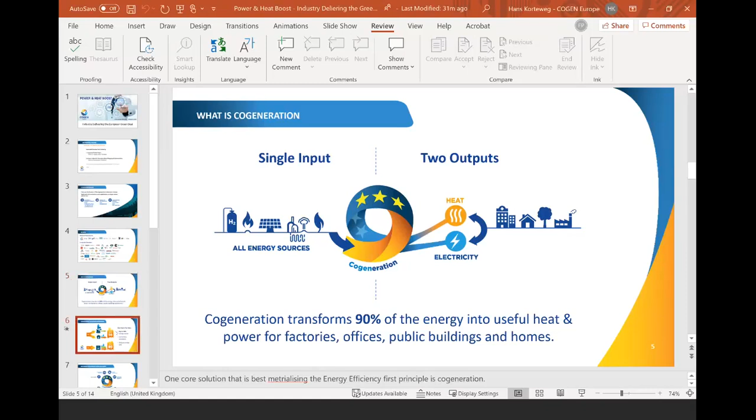The efficiency gains are well established, well known, and well proven in terms of how they are tracked and reported. It's one of the few sectors - in fact, it may be the only sector - that has full transparency of its efficiency. Most other sectors, it's more implied than given. A well-installed cogeneration plant can save up to 40% primary energy. It will cut carbon emissions, and it will reduce the consumer's energy bills. Those three things are the raison d'être for cogeneration.

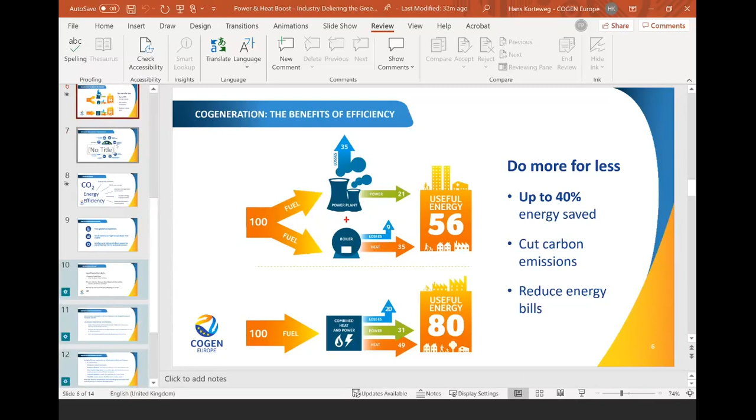Cogeneration is supported by many pieces of EU legislation. Sometimes they could be better, of course, which is Cogen Europe's job - to ensure we get an improvement. But it's especially apt for meeting the new challenges of the EU's energy systems. So it saves energy, as I've already mentioned. It cuts carbon dioxide emissions. It lowers energy costs, which is crucial in this sector for global competitiveness of industry. It allows the integration of renewable energies.

It provides flexibility across heat and power sectors. It avoids costly grid reinforcements. And, to use a horrible jargon word, it is smart grid ready. The final point is it empowers citizens and businesses to engage in the energy sector, where without cogeneration they're often just consumers of gas and power or whatever other fuels.

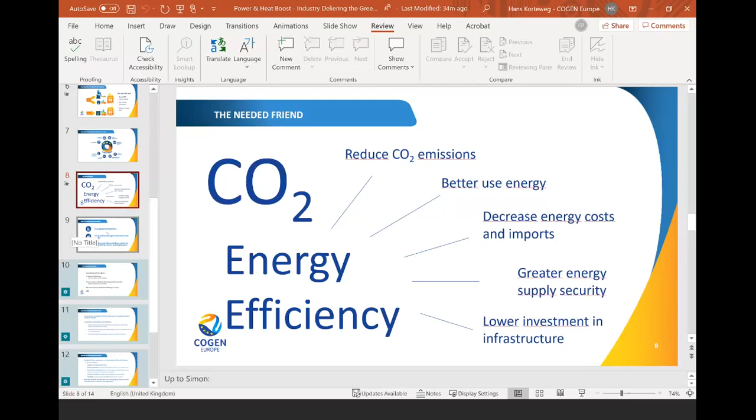There's been enormous focus over the last few years on CO2 emissions, and the energy efficiency principle has been sort of downgraded a bit. But energy efficiency is vitally important in this process. Energy efficiency means you need less fuel to do the same activities, so cogeneration is a better use of input energy, whatever that input energy may be. It reduces costs and the need for imports of energy into the EU system. It provides greater security of supply, and ultimately it is the least cost and most efficient way of delivering heat and electricity services.

Focusing now on the industrial sector, many industries across Europe use cogeneration already. It is a substantial piece of the utility infrastructure for industries. It helps them face global competition. It is especially important where you have the need for high temperature heat and steam, and alternatives to that are either vastly more expensive or effectively technically impossible. It allows industry to have that flexibility and a certain amount of insulation from fluctuating energy markets.

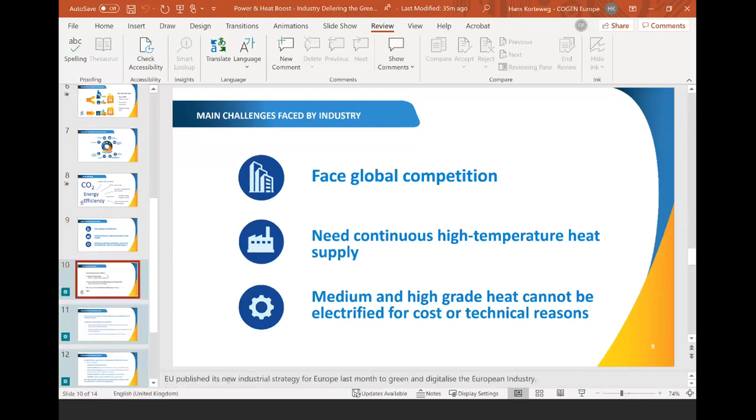So my final slide now was just to introduce the speakers again. We have two speakers with different case studies: one on toilet paper and the other on green industrial processes. Now I hand over to Marc Vignal from Solar Turbines to talk about the impact on the toilet paper industry, which, given the coronavirus aspects and the run on toilet paper, is a very apt subject for today's discussion.

Thank you, Simon. So, quick question: do I present the slides myself, Hans, or? Yes, Thomas is about to give you presenter mode. Okay, so... share. You should be able to see my slides right about now.

Perfect. Okay, thank you, Simon, for the introduction, and thank you to Cogen Europe for enabling this outreach of information to members, participants, and invitees alike. My name is Marc Vignal, I'm the marketing manager for Solar Turbines based in Belgium. We thought it would be very interesting to present a case on something very close to everybody's heart right now.

As Simon mentioned, the run on toilet paper earlier in the year due to the pandemic makes it clear to us that it is something of essential need, and we're happy to present a case study to support this.

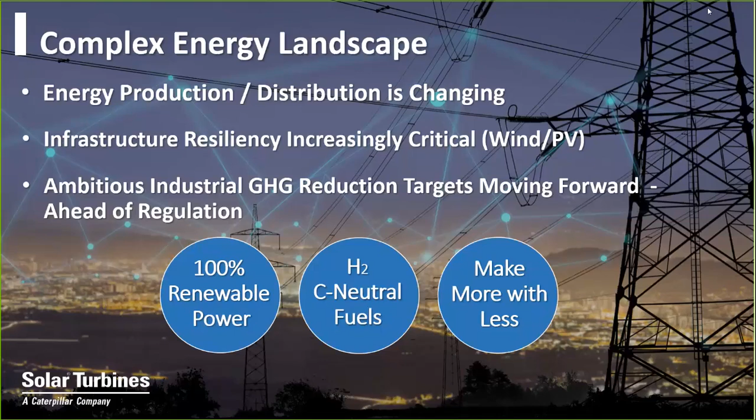Now, in terms of the footprint, obviously, industry is trying to make its own impact. We see beverage companies moving to different types of packaging to cater to customers' needs. And we see the champions of the recycling and biomass industry, tissue manufacturers and the pulp and paper industry, doing what they can to become less energy intensive.

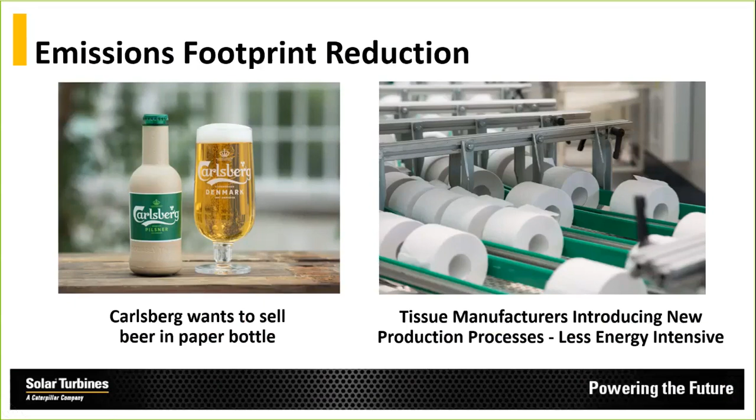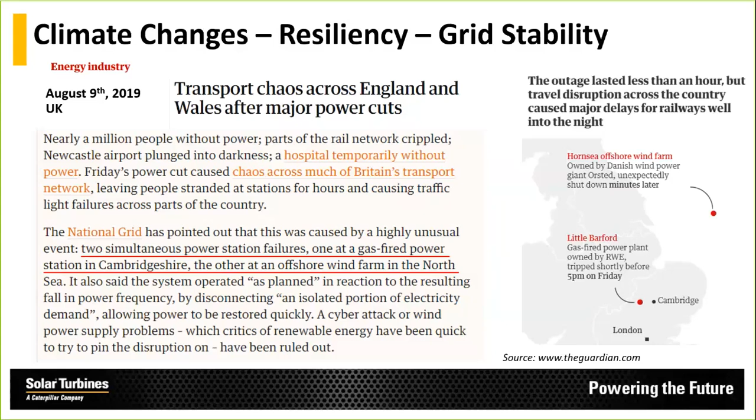As an additional justification, and this is probably closer to some of our UK members' hearts, I wanted to share this one example that took place in August of last year in the UK. We saw two simultaneous events that completely crippled the grid in the UK, leaving users, industry, and hospitals without any power, because one gas-fired power plant and one offshore wind farm shut down suddenly, causing an under-frequency in the grid, which essentially shut everything down. Obviously, in this day and age where hospitals are so critical, where distributed power is starting to become more attractive to users, we see this as an opportunity to present additional options to the industry for distributed power.

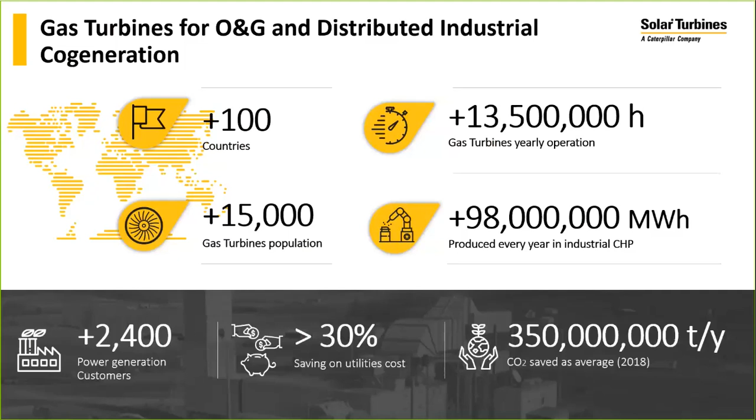Now, in terms of cogeneration and Solar Turbines in general, we are a manufacturer of industrial equipment for the oil and gas and power generation industries. We've got over 15,000 units installed worldwide, over 2,400 customers in the power generation industry alone. So we see a great benefit in the cogeneration industry to enforce that message of making more with less.

Now, in terms of the new applications and the way that the industry is shifting, a significant part of our research and development budget is driven towards fuel flexibility and fuel optimization. So we're continuously trying to reduce greenhouse gas emissions.

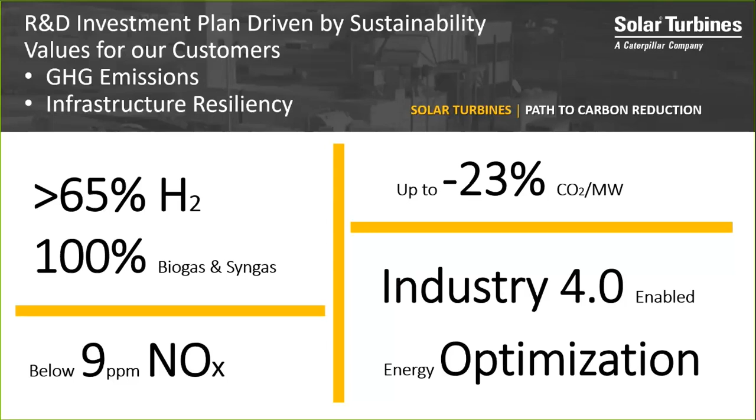We've got equipment that, as a standard, can do 9 ppm of NOx, and in special cases can go even lower than that. We're driving to utilize green fuels and blue fuels like hydrogen to ever greater extents. And we obviously are looking, as Simon mentioned, at smart grids, smart optimization systems, what we call Industry 4.0, as being key to making sure that we use all the resources as efficiently as we can.

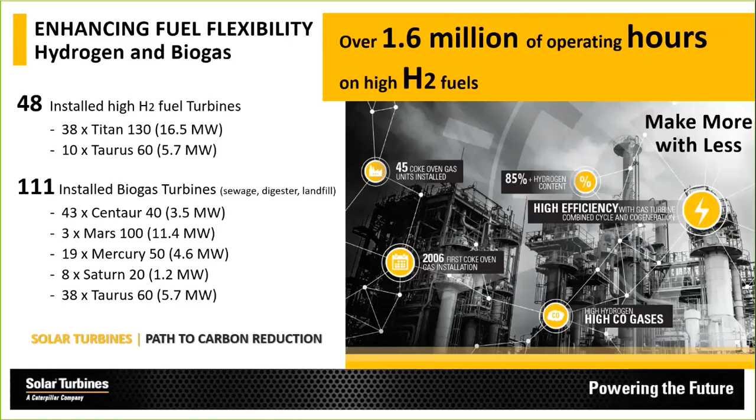Now, in terms of that fuel flexibility, hydrogen is not something that is new to the industry. We've got close to 50 units installed worldwide operating on high hydrogen applications, and over 100 applications where biogas or biomethane waste gas are used. So we've acquired a substantial number of operating hours on these gases. Again, we're looking for highly efficient combined cycle and cogeneration applications to make sure that we can deliver electricity and heat to users in the most efficient way possible.

Now, obviously, we have to do this in a reliable and flexible manner for our users, and always looking to operate with the pipeline gases that customers have available to them.

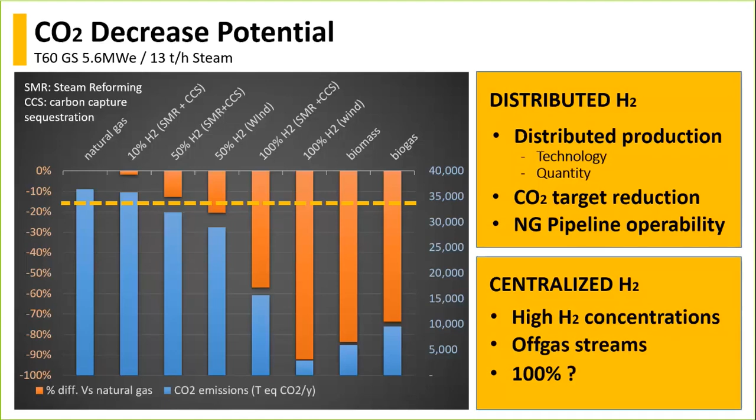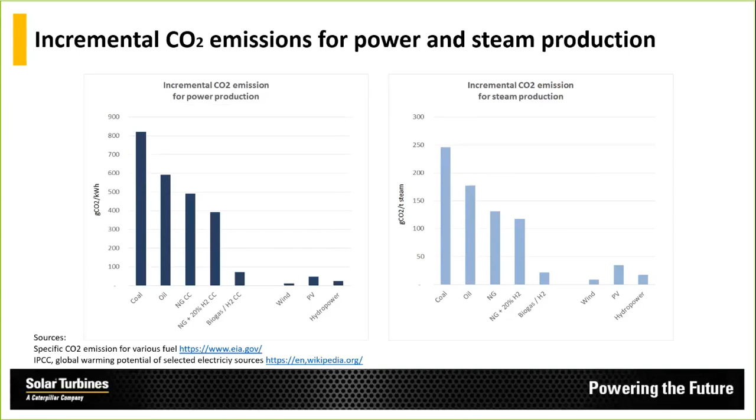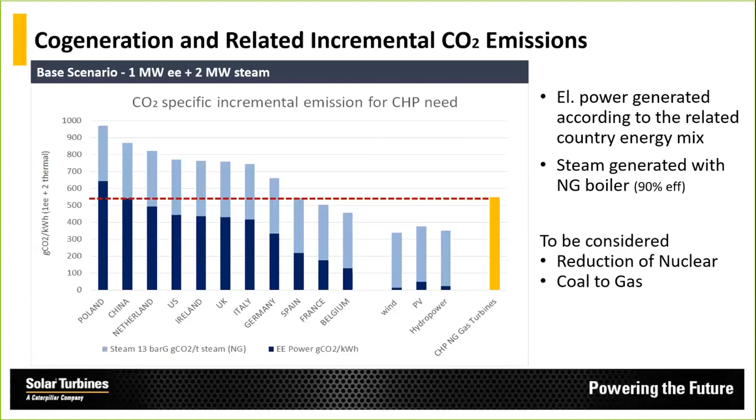So we're also talking about not only greenhouse gas emissions, but also the economics behind these projects, and we need to provide solutions in distributed power applications that provide customers with the opportunities to reduce emissions as well as find economic benefits in how they're generating their heat and their power.

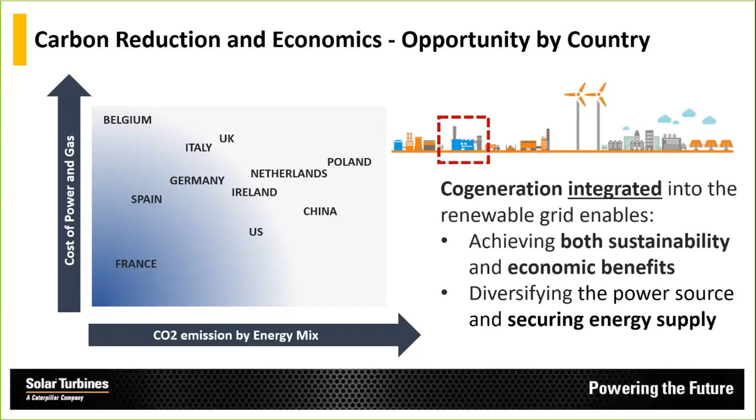Obviously, we're talking about diversifying the power source and securing the energy supply to avoid the cases that we saw in London and that we see worldwide, where the more users are on the grid, the more tricky it becomes to manage. And with the advent of renewable technologies, it becomes even more complex.

Now, to go straight into our case study or case example: toilet paper. As Simon aptly mentioned, this is not something that we expected to see become a highly trendy, run-for-the-money type product in the industry. But the beginning of this year was extremely particular in the sense that we saw a fantastic shortage of toilet paper pretty much on a worldwide basis.

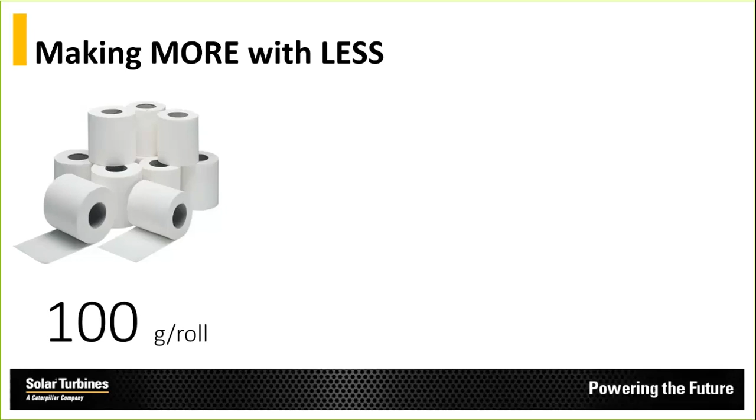You'll find different measures of how to calculate the CO2 impact for toilet paper, but you can consider this a general rule. Any toilet paper roll is around 100 grams per roll, and it takes around 90 watts of electrical power and around 200 watts of thermal power to be manufactured. Now, depending on where you are in the world, this can mean between 80 grams to 120 grams of CO2 per roll of toilet paper. And let me reassure you that these numbers we've checked and rechecked, they are even slightly conservative, depending on who you ask in the industry.

Consider that in 2018 alone, we manufactured on a worldwide basis around 380 billion rolls. You can see how using energy more efficiently can provide a significant reduction in greenhouse gas emissions. Taking the example of Poland, a standard application with no CHP costs around 13 million euros per year, emitting around 99,000 tons of CO2. If we consider a gas turbine CHP, a standard cogeneration application, we reduce that price to about half, and emissions are reduced by about 20%.

Going the next step toward digitalization and intelligent use of resources means having the power generation equipment connected to the grid, constantly comparing the price electricity is sold at, the price of gas, and when is the most efficient time to generate power locally versus taking it from the grid. We see a further reduction in emissions to about 28% by using the appropriate amount of fuel at the right time and not burning fuel inefficiently at low or part load. The cost is further reduced to about 54%.

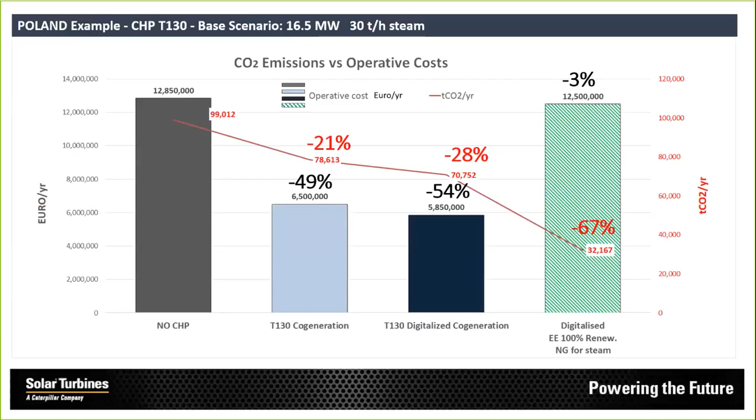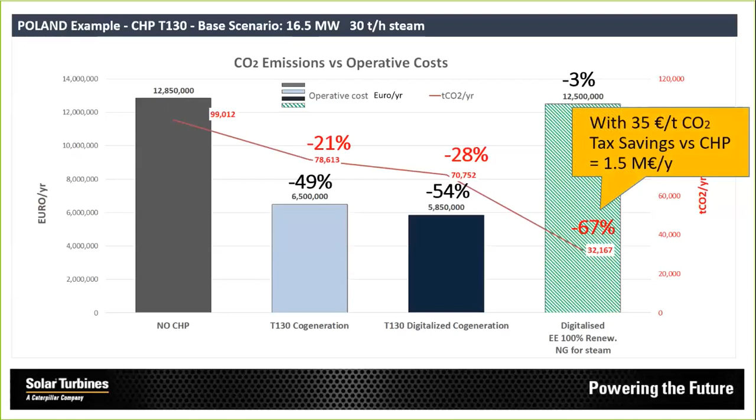We're firm believers, and I think the numbers themselves are pretty drastic in the impact we can make on greenhouse gases, while still providing substantial savings to customers, considering what CO2 taxes are going to be and are only going to become higher as time goes by.

As a quick conclusion, we see renewables coming into the market as a fantastic potential for reducing emissions, but they do provide challenges in terms of instability and resiliency of the grid. They provide significant greenhouse gas reductions, and we also see that in industrial CHP type applications.

We also see secure thermal production internal to the customer at a substantially lower cost than if generated separately. We can also see a transition to the new carbon neutral economy, where we start to use green fuels like hydrogen and biogas.

In the case of distributed power generation, where CHP is used on a gas turbine basis, we take it one step further with local integration of the grids, whether heat, gas, or electric, to provide something desperately needed in the grids to maintain resiliency and stability: rotating mass. As Simon mentioned earlier, the electrification of medium and high temperature steam is not particularly cost effective or technologically feasible today.

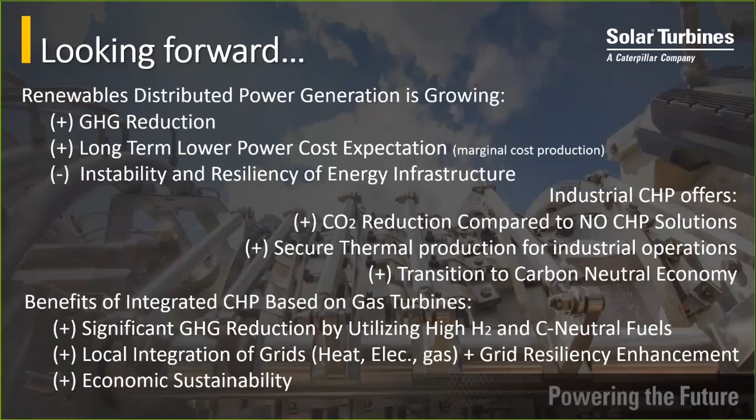So in summary, this provides a very good economic and sustainable solution to customers in the industry. Thank you, and I hope to receive some questions further ahead.

Good morning or good afternoon to everybody. I'm Sabrina Santarossa, working at Turboden. I'm sales manager for waste heat recovery applications in industry. Thanks for the possibility to give this presentation in this webinar. The presentation is focused on green industrial processes benefiting local communities. We will see some real cases of application in industry together with local communities.

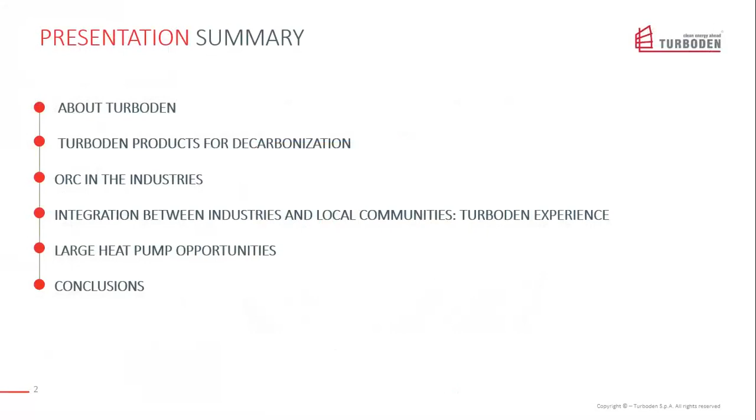I will first introduce briefly Turboden and our products, then focus on ORC in the industry, move to real cases, and also talk a little at the end about possible applications of large heat pumps.

Turboden is an Italian company. It was founded back in the 80s by a professor of the Polytechnic of Milan. Since the beginning, the company has focused on designing, manufacturing, and maintaining organic Rankine cycle systems that are highly suitable for distributed generation. In fact, the typical size ranges from 500 kilowatt electric up to 20 megawatt electric power.

The input to the ORC can be biomass, geothermal, and of course waste heat from industrial processes. Turboden is not only producing ORC. In the last years, we have also developed our attention to other products like gas expanders and large heat pumps.

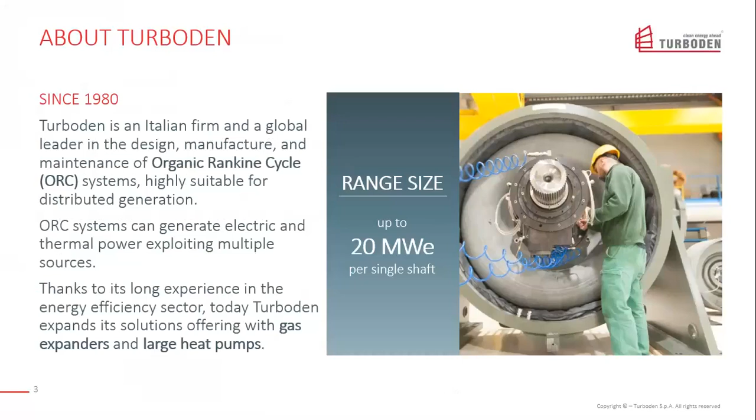Since 2013, 51% of the company was acquired by Mitsubishi Heavy Industry. So we are now part of this big Japanese group, in particular in the power systems division.

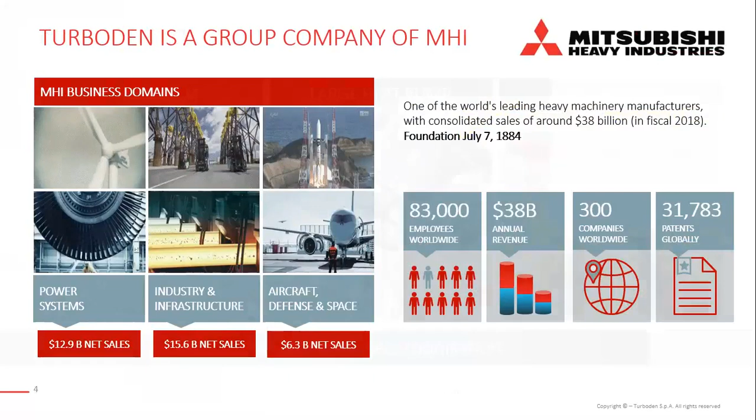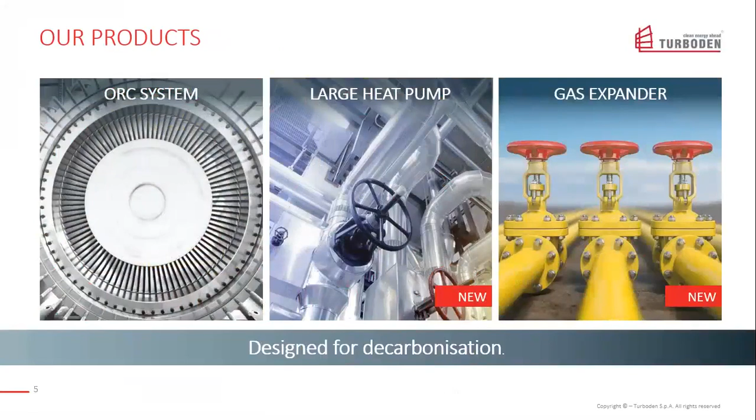As said, we have three main products: of course the ORC, that is our original and core business product, but also large heat pumps and gas expanders. All these products are designed for decarbonization. They can be employed in projects with the aim to lower carbon emissions.

Decarbonization in the last years is a word that we have heard many times, and we have seen that there are many policies and efforts to go towards a decarbonized future. We can do this also taking into consideration that we need to consider not only the energy sector or the transport sector, but also, of course, the industrial sectors.

In industrial processes, some possible answers are reducing emissions, so of course increasing the energy efficiency of the process itself, but also reducing energy consumption from the grid, and this can be done with heat recovery, recovering the waste heat that is produced by the industrial process.

But a step forward is not only to look at the single industry, but to have a wider look, also looking at the needs of the local communities and neighboring industrial energy needs.

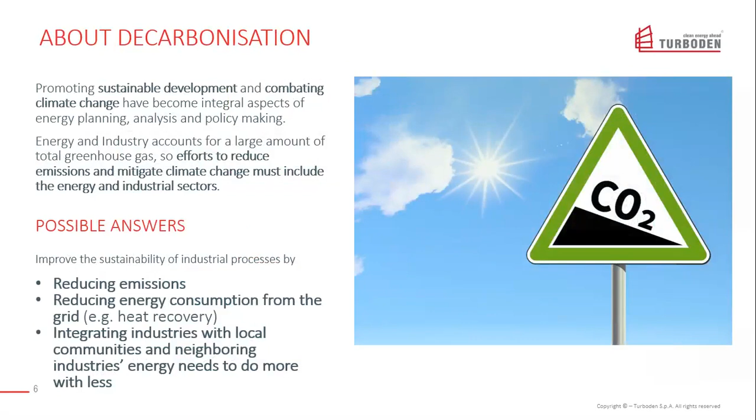We can recover this waste heat and feed an ORC system. The ORC system converts this heat into electricity that can be used by the process itself, or it can also be sold to the grid.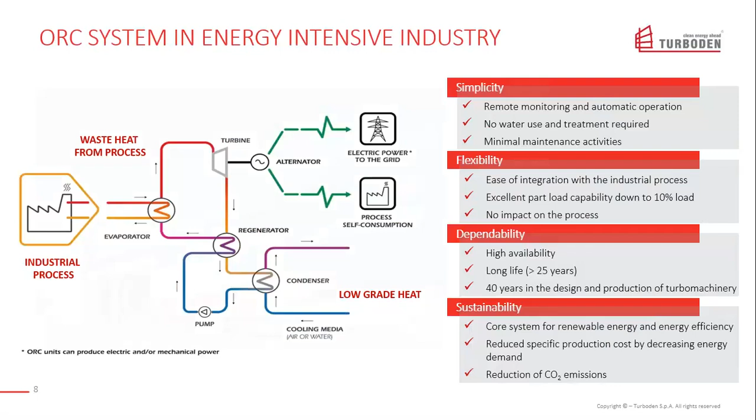Going more into specific cases, I will talk first about this plant that is here in Italy, very close to our office. It is a steel industry plant, ORI Martin. It has been in operation since 2016.

We are recovering the heat from the electric arc furnace, one of the processes you can find in the steel industry. The heat is recovered from the exhaust gas of this furnace, and this gas heats up saturated steam. The saturated steam is used to produce electricity through an organic Rankine cycle system. We are producing about 2 megawatts of electricity by recovering the heat from the electric arc furnace.

But this project is not only producing electricity. This is a wider project where, in summer, as said, the steam is used to produce electricity. And this electricity is able to light up 700 houses.

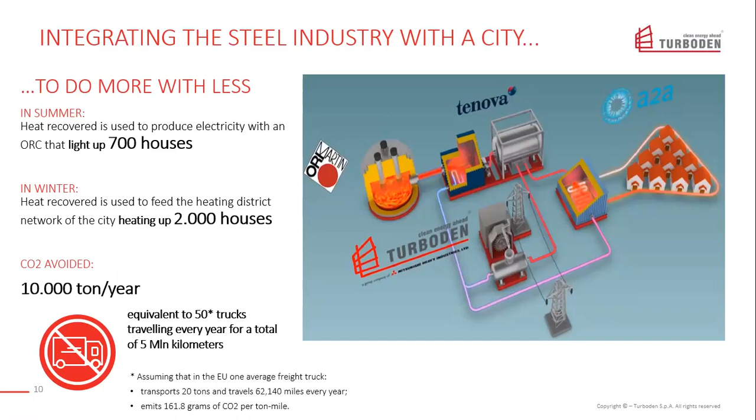Thanks to this project, we can avoid emission of CO2 of 10,000 tons per year. To give you an idea of what this CO2 emission corresponds to, it's like not having 50 trucks traveling every year for a total of 5 million kilometers. So it's quite a huge quantity of CO2 that we can avoid.

Another example, very similar to the one just presented, is a project under construction in Switzerland. In this case, the industry is cement production in the city of Eclepens, in the French part of Switzerland, where they already had heat recovery since 1983.

They were already using the waste heat to feed the heating district network of the city. But of course the heat is not used all year round—in winter you need more heat to heat the houses, but in summer the requirement of heat is lower. So they decided to further improve the total efficiency of the system by installing an ORC fed by the hot water that is not used by the grid, by the heating district network.

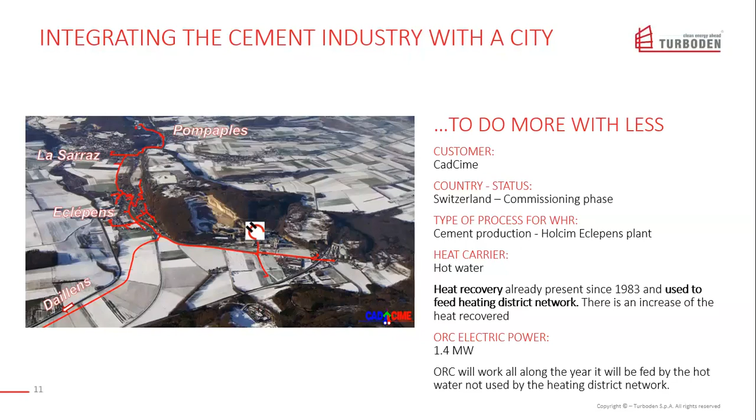In this case, the size of the ORC will be smaller, 1.4 megawatts, and it will not produce electric power constantly. It will produce more in summer, where the heat is not used by the heating district network, and less in winter, where most of the heat is used by the network. But it's another good example of integration between industry and the local community.

We don't have only examples about industry and local communities, but also an example of symbiosis between nearby industries. There is this project in Germany in operation since 2013, where again it's a heat recovery from an electric arc furnace—we're talking about the steel industry, in particular Stahlwerke Feralpi.

Also in this case, the heat carrier used to recover the heat is saturated steam. The furnace is bigger, so the electricity produced by the ORC is higher—we can reach 2.7 megawatts.

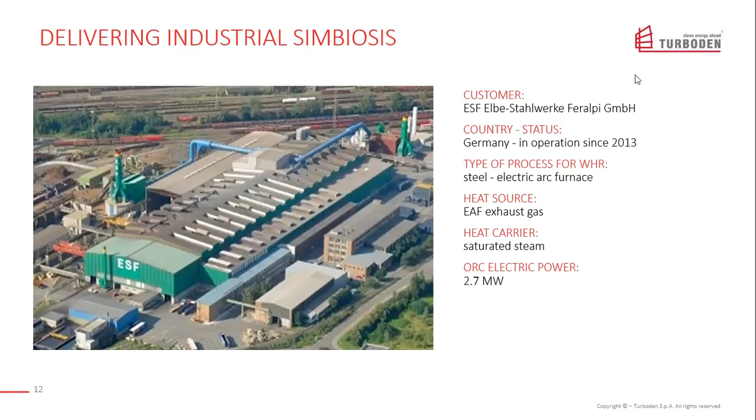But what's nice about this project is that two-thirds of the heat recovered through this heat exchanger is used to produce electricity, while one-third of the recovered heat is sold to a nearby industry.

Near Feralpi, there is Goodyear, which produces tires, and in their process they need saturated steam. So instead of burning fuel to produce the steam they need, they buy it from the nearby industry, which is producing it in a green way because Feralpi is recovering the heat.

So we have a double benefit: Feralpi decreases their electricity consumption from the grid, resulting in lower CO2 emitted by the electricity provider, and they can also generate new revenues.

Goodyear is also no longer using energy to produce the steam, lowering the CO2 emissions of the industry and decreasing its energy cost. So this is a good example of how two industries close to each other can take advantage of one another.

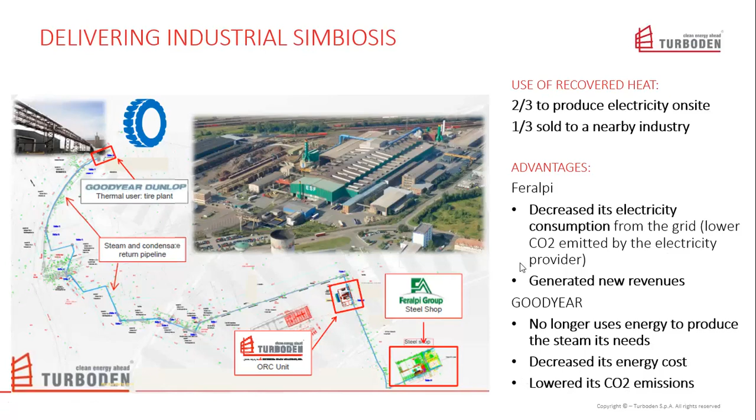So in one case, we have waste heat that was not used before this project. In the other industry, we have two benefits. And so this is an example of a win-win situation.

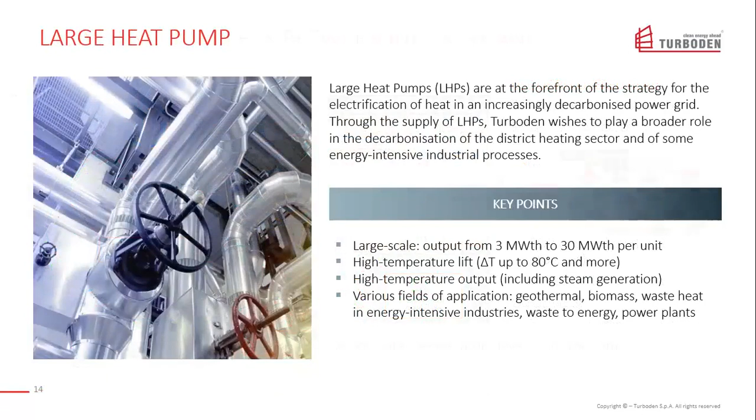As said, Turboden is not producing only ORC—we are also producing large heat pumps that can be employed in industry too. For example, there could be this situation where, let's take again the steel industry (though it's not the only one), there could be some low temperature heat available.

Let's take again an electrical furnace, where there is not only a huge amount of exhaust gas at high temperature, but they also need to cool the furnace, using hot water to do this. But that hot water is usually at a very low temperature, around 75 or 70 degrees, something in that range. And so this hot water that they have available must be cooled down.

On the other side, we could have district heating networks where they need heat. But many times the temperatures available from the industry and the temperatures needed by the district heating networks are not matching.

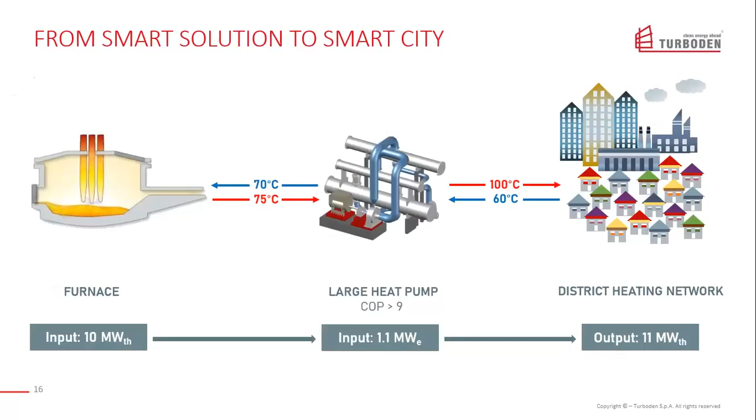So installing a large heat pump in between these two needs, we can increase the temperature of the hot water available from the steel to the temperature required by the district heating network and deliver the heat to the district heating networks. Of course, in this case, you need some energy to increase the temperature. The energy required, in this example, is about 1 megawatt.

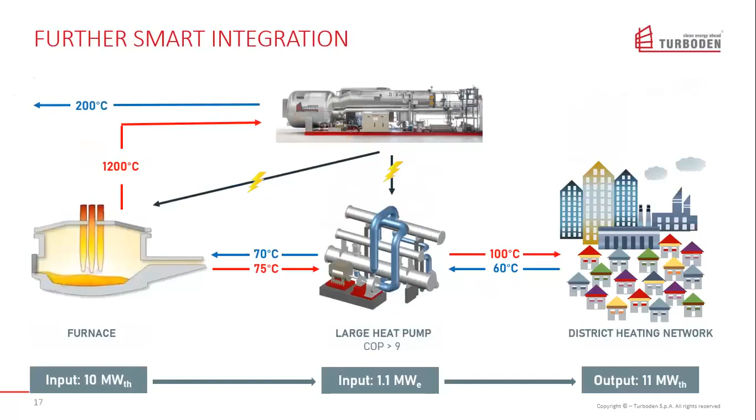So the perfect situation would be to do heat recovery from the exhaust gas of the electrical furnace, producing electricity with an ORC. Part of the electricity from the ORC will be used again in the industry, and part of the electric power produced by the ORC can feed a large heat pump to increase the temperature for the district heating network. So this solution would be beneficial and the perfect situation to maximize the energy efficiency and to maximize the use of heat and power.

So to conclude, the valorization of waste heat is possible, and it helps to decarbonize industries and cities. It also helps to deliver system integration and industrial symbiosis. We believe that the excess heat available in industry, and there are many industries where excess heat is actually wasted, could be one of the main sources for clean heat and power generation, giving a useful decarbonization help to the future.

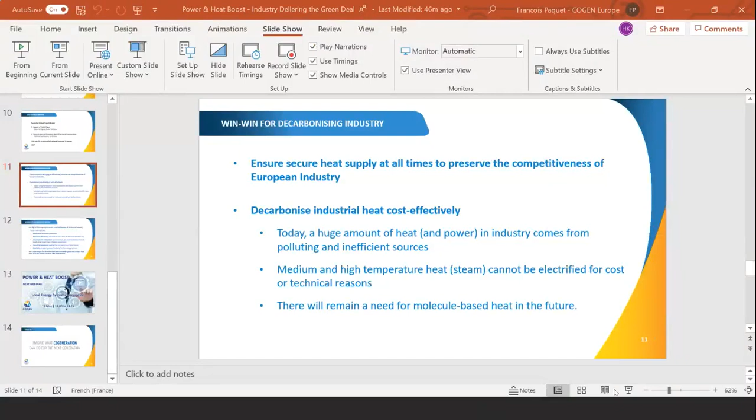So one question coming from the participants is, in view of the examples shown today, do you consider there's room for CHP in the European Union in the 2030 horizon and beyond? So looking to 2050 as well. And then there's a question also about the economics of energy efficiency solutions running on renewable gases. It's addressed to Solar Turbines, but perhaps Sabrina can also comment on that. And then a more technical question for Turboden: are there any developments towards higher discharge temperature for heat pumps, for example towards 40 bars steam, so 250 degrees Celsius? Any of the speakers would like to respond?

Sabrina, I concede to you, go right ahead. You're on mute. Oh, sorry. Starting from the last question, we can already provide some steam with the large heat pumps, not 40 bars, but a little bit lower pressure, let's say more low-medium pressure, up to 30 bars. If you have any need, we can study also different solutions, or depending on if you have heat available from the process, it would be better to use that heat to produce steam at this high pressure, I believe.

Then on the CHP possibility in the future, yes, I think it will be, of course, beneficial to have and to push for CHP solutions in the future, in 2030 or whatever timeframe, supposing that climate change will not become as high as turning into tropical weather, in which case we will need cold, not heat. And then the second question was related to some investment, if I'm not mistaken—yes, the economics of CHP running on renewables, given the very low oil prices in the current COVID crisis. Answering about ORC, so not for Solar Turbines.

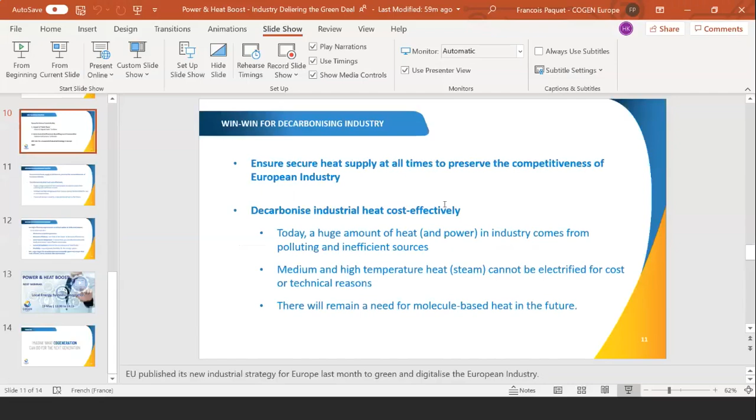Well, I would say that one of the greatest benefits of wind energy is that it's there, and if it's there, we should utilize it as much as possible. But the fact is that it's variable, and that provides an interesting challenge, because what happens when you need the heat but you don't have the electric power to generate it? In those cases, I would say that yes, it becomes a little bit more cost effective based on smaller sizes. We certainly don't manufacture that type of equipment, so I'm probably not the best equipped to respond. But from a sustainability perspective, clearly, if access to wind power is there, it's going to be necessary to take advantage of it and make sure we rationalize it in terms of cost.

Thank you, Mark. One final question - it has to do with CO2 neutral Poland and the scenarios that Solar Turbine presented. The question is, what were your assumptions about the investments, and how would you make such a project economic? Would you need incentives and a policy framework that supports such a pathway?

Okay, well clearly having country incentives like what we see in Italy right now makes a CHP application very, very interesting, because the payback on the project is substantially shortened. Typically we see customers doing the calculations, and anywhere between 7 and 8 years is already feasible. But with the right incentives - taxing CO2 or providing further incentives for certain applications like CHP - it becomes economically very, very feasible. Now, it's absolutely correct - if there are no financial incentives from the member state or country to go in that direction, the payback period is probably going to be a little bit longer.

So assuming you can hear me, thank you very much for the speakers today and for presenting those very concrete elements of what is a successful story in industry and how this can concretely help industrial players to decarbonize and bring what we call a more circular economy from the energy sector perspective by using energy flows in a better way.

What we certainly heard today is that heat is a central element of industrial life. Heat is key for running the production lines every single day of the week, and also to minimize production costs. This is a key element of European industry's competitiveness, facing global competition. So what we heard today was really the question of ensuring this heat supply security at all times to preserve the competitiveness of Europe.

A second key element we heard, judging by the presentations, is the question of heat, which is also an important factor of CO2 emissions in Europe. That's a quite big challenge when we look at industry, because there is a huge amount of heat, and also power, but let's focus on heat, that today in industry is being wasted. That comes from polluting and inefficient sources. So when we look at the trajectory for decarbonizing Europe, we need to tackle those wastes.

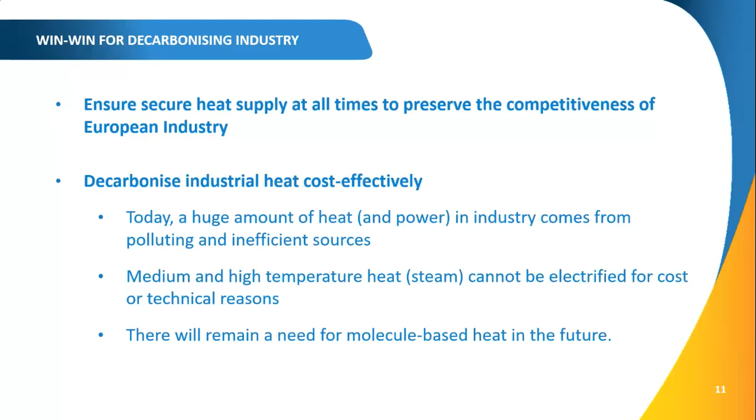A key element from the point of view of cogeneration is that this energy today can no longer be wasted, and we need to set high efficiency cogeneration as a default option in industry and SMEs producing heat at high level temperature. All this to do more with less.

Cogeneration should become the default option over the separate, less efficient, more polluting production of heat or power, to modernize and improve the energy efficiency and environmental performance of existing industrial processes. That's ultimately going to reflect on the environmental footprint of the products we consume every day in Europe. This should help deliver significant CO2 reductions already today, and that's all the CO2 we don't have to remove from the atmosphere tomorrow.

Making links with the current files being discussed at European level today, the Just Transition Fund should really look into transforming and modernizing carbon-intensive regions and industries, and looking at solutions like cogeneration should be part of this focus.

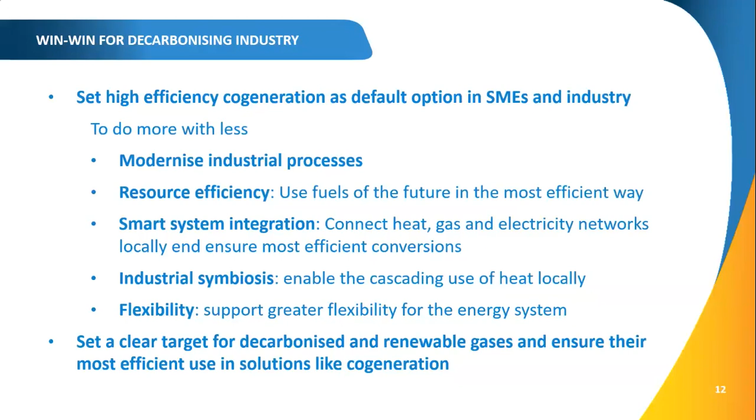Without any further addition, I will pass on the floor to Hans, who will introduce the next webinar. Thank you, Francois.